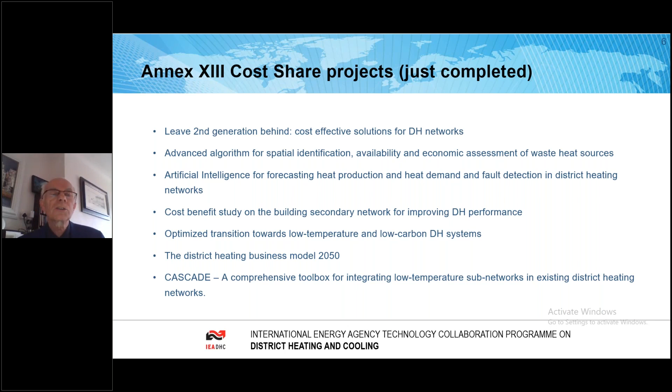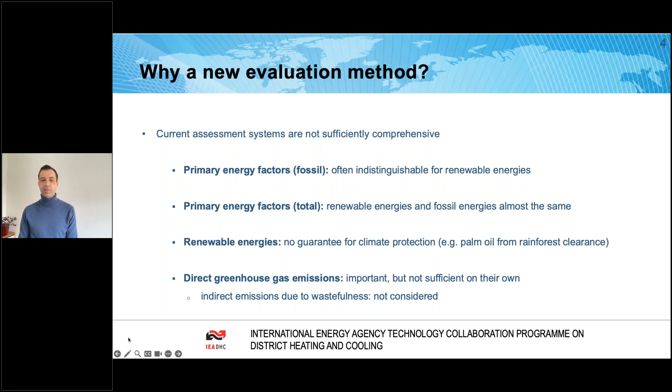I asked the organizers to include the word exergy in the title. I know it's a bit confusing, maybe a bit unsettling, so I hope I can explain it in a simple way. So what is exergy? Everything starts with energy that you should be familiar with, but energy is not the same as energy. It has different forms, power, heat, and if that is considered, one can say energy has a certain quality, and the product of energy and energy quality can be considered exergy.

So what is now this energy quality? So if you look at an energy flow and its potential together with the environment to produce electrical power, that's essentially the energy quality. So if you can convert 100% of the energy you're looking at into electricity, then it's 100%: electricity, mechanical work, or even fuels, because it's an ideal value. So if the machine were perfect, what is the physical potential of it? With heat, even with an ideal machine, it depends very much on temperature how much electricity could be generated.

And that leads to a couple of insights. For example, energy is only converted, exergy is consumed. So when people are talking about energy consumption, it's physically not totally correct, because energy is just transformed from one form to another. Easily seen in gas boilers, you put in fuel energy, it becomes high temperature or moderate temperature heat, and then it becomes ambient heat once it leaves the building through the envelope. Exergy is the product of energy and energy quality, and it can be understood as valuable energy. So power equivalent, but let's say just valuable energy.

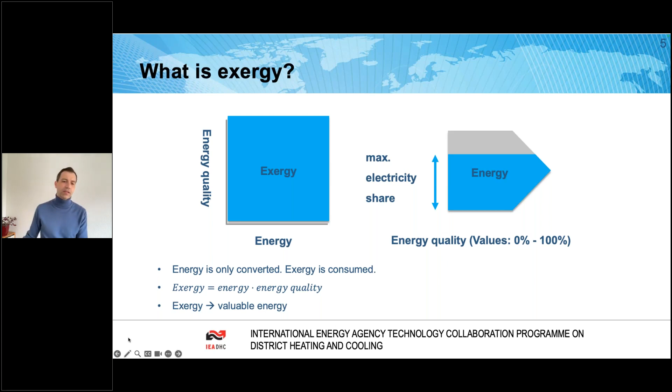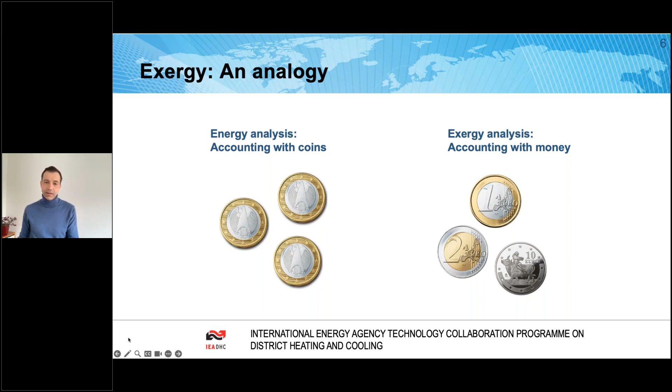An analogy can maybe illustrate this a bit further. So energy analysis is like accounting with coins. So 1 kilowatt hour equals 1 kilowatt hour, whether it's gas, whether it's power, whether it's heat, it's all 1 kilowatt hour. And it seems to be all the same. As I said, the energy quality is not considered, and accounting with coins is also not very helpful when doing bookkeeping. So exergy analysis is kind of the upgrade, accounting with money. So now there is a value printed on these coins that is also considered in the accounting. A high value energy is traded for many more coins of low value energy, and that then can be considered a fair trade.

From the definition of exergy, a bit of expansion: resource exergy. So what are resources? Energy and raw materials from the environment. They can be measured in exergy. Why is this important? Because sometimes balance boundaries are set in a not very helpful way. And why resources? Because resources are storable. That means if we don't use them today, we can use them tomorrow. Therefore, being frugal with them makes sense.

Solar energy, on the other hand, is fluctuating. Therefore, while it makes total sense to make the most out of the solar energy, for cross-technology comparison it cannot be the primary energy or the resource, because otherwise we would have to consider the solar energy that went into biomass or into natural gas or into other fossil fuels as the primary energy if we wanted to do a fair comparison, to avoid that kind of, let's say, ambitious project.

The approach to resources was taken, so it's an energy form that is directly storable in the form you are looking at. That means for solar, PV panels produce the storable resource electricity. Solar thermal produces the storable resource high temperature heat, and that is essentially the input in the system and in the comparison. So this resource exergy analysis is a method that considers exergy and sets consistent balance boundaries.

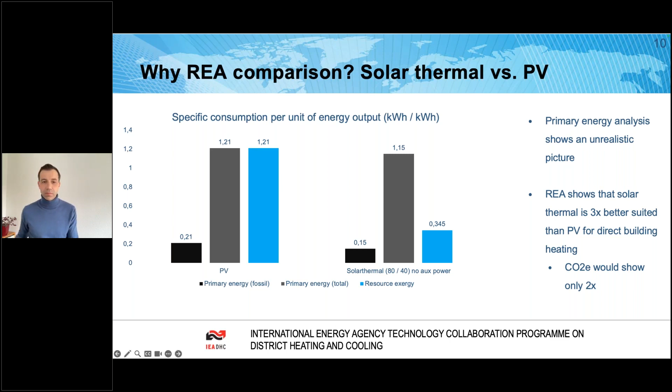One can argue CO2 emissions would also show a small difference, but they are very small anyway. So if any savings are calculated, the savings by employing either PV or solar thermal in terms of CO2 are almost 100% in both cases. And also we would miss the impact on indirect emissions just going for CO2 emissions. Primary energy analysis, on the other hand, shows an unrealistic picture, as we've seen, since it doesn't consider energy quality.

So how can resource exergy analysis support solar thermal networks? It supports the argumentation for such networks by quantifying their advantages comprehensively, showing that these networks already provide a green and resource saving solution that cannot be provided by any type of electrification that uses the grid mix until it's completely carbon free. And when that is happening, we don't know, especially in winter during heating season.

It helps to consider the solar thermal networks in comparison with other solutions, district heating solutions and other individual solutions, and it allows the quality control of analysis results. As I already said, they can be quite wrong without anybody noticing, because nothing breaks down if somebody comes up with a misleading CO2 number or primary energy analysis result. So it helps to mitigate the risk of greenwashing and costly mistakes.

How can this now help with well-informed decision making? Now here is an example of three indicators that can be used to comprehensively do screening of various technology variants of various transformation pathways. One is resource consumption, resource exergy consumption. One is greenhouse gas emission in CO2 equivalents, and one obviously is costs, ideally life cycle costs. But for the first step, maybe costs of energy would be sufficient, simply because if the costs of energy are lower than the reference case, this is a technology that can essentially pay back in time.

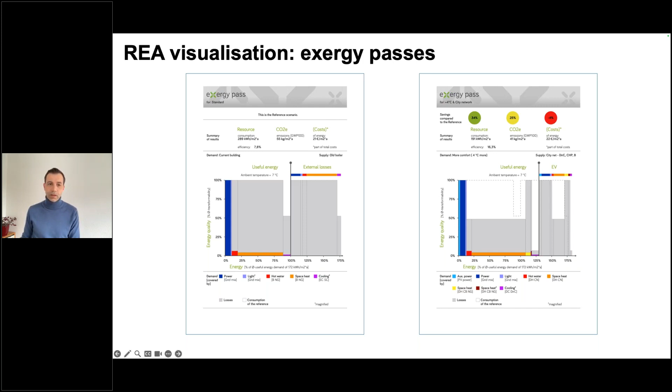And what can authorities do? Well, they can inform the technical staff of the calculation guideline that AGFW, the program manager, put forward, that contains all explanations, equations, and LCA data. You can get accustomed to resource exergy as a key metric for savings and efficiency. Require such calculations for transformation plans, at least as a quality check,

because, as I said, it can be easily wrong without anybody noticing, especially when heating and cooling are included, especially when solar is included, because for solar thermal, there's also one issue with the LCA analysis, that the solar energy is considered primary energy, while it cannot be saved by not using it. So I think that might be a problem that resource exergy analysis can also solve. If you're interested in this methodology, contact me for more information on how to apply it most easily.

I'd also like to end with a small metaphor. Heat and transformation plans without scientific validation are like a car without official approval. You can't rely on them. And since countries and municipalities place a lot of money based on these plans, I think it's worth doing a double check, ideally doing something like resource exergy analysis.

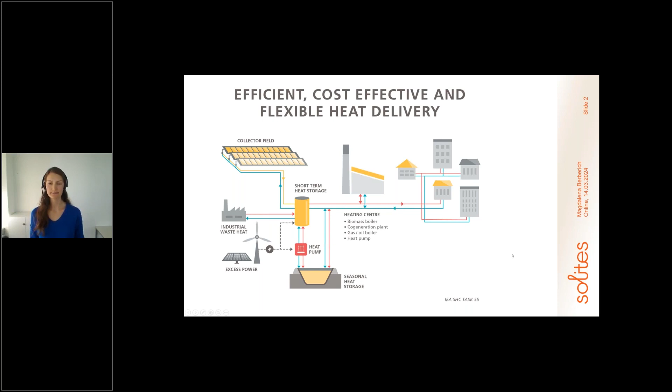So you need some waste heat or other excess power or other components with renewable heat as renewable heat sources. Then here in the district heating systems, there is the demand in the buildings, and you have a heating center in the middle with maybe more system components. I have some examples so you can see how it looks in reality.

Here the solar heat grid in Ludwigsburg. You see here the construction works. It's a simple method of construction with ram profiles in the ground. It's very fast and cost efficient. And on the right side, you see the picture of the installed collector field near the city. So here you have a direct delivery of heat to the city's district heating network.

And here's one example where you have the field shared between two grounds. So in the middle is the street, and here the neighbor city has this field, and this is the field of Ludwigsburg. So it was, I'm missing the word, but it was not so easy to get the permission to build it because it's divided into two areas of cities.

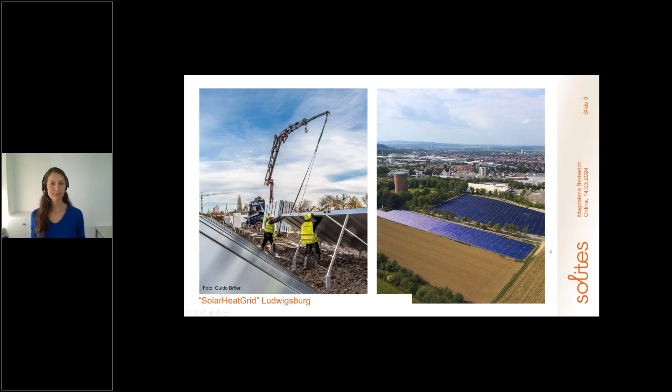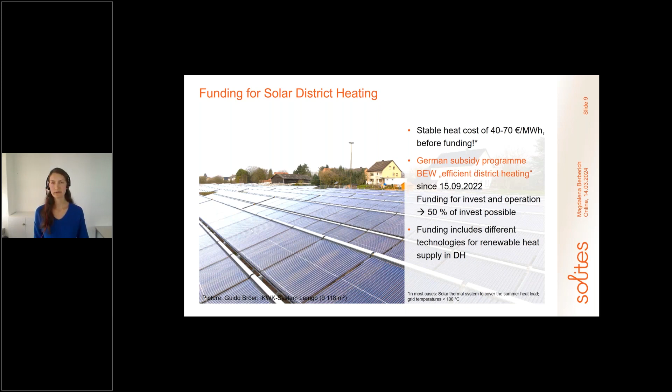And we see that there is a good development in the market, but there were some stops or not so much development here in 2021, for example, because for 2 years there was the waiting for the new funding scheme BEW. It was said that it will come, but then it needed more time, and so the market was waiting, and the investors, of course, waited and said, no, I will not invest now, but I will wait for the good funding opportunities. And so the plants which were thought about in 2021 were just installed in 2022 and in 23.

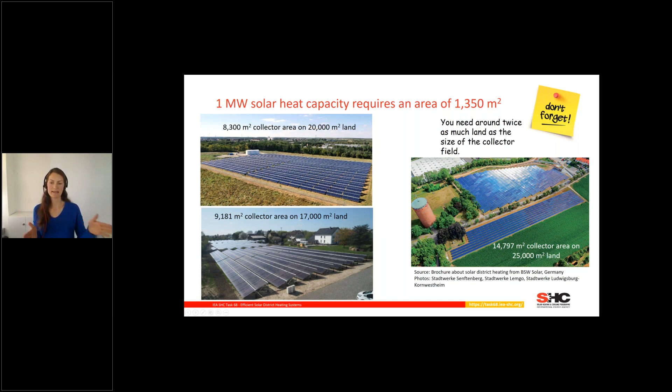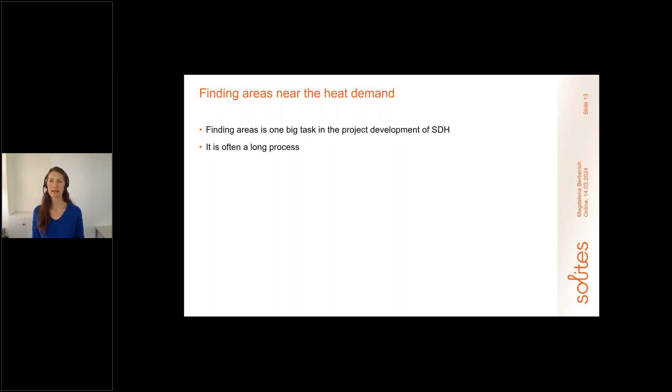So finding areas near the heat demand is very important, and a big task in the project development. And it's often a long process. What is important for this? The communication between utilities, investors, and the local authorities. A structured analysis of possible areas, and it's better you find more areas than less, so you can use them maybe for other future projects.

One example as a best practice here for almost fossil-free district heating of 95%. It's a system which is in the real planning process now, and it's very special because here a big heat storage is built in an earth landfill, and so you can store the solar heat seasonally, and so provide it very efficiently to the houses. It's a new building area, and with the solar thermal, the heat storage, and shallow geothermal, 95% fossil-free district heating is possible.

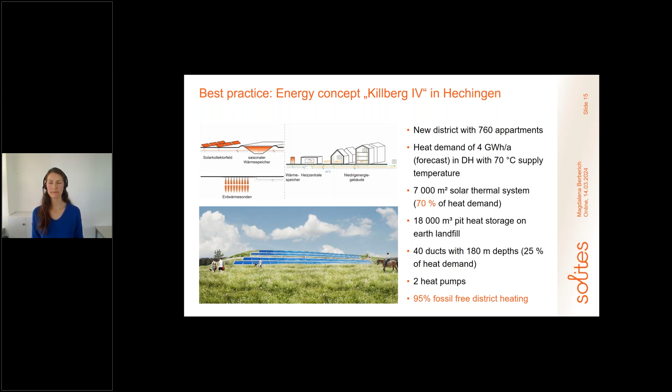Another plant which is just installed and will soon be in operation is in Sonnershausen. It's 6,000 square meters of collector area, and it's a new product. It's high vacuum flat plate collectors, and it's very efficient because these high vacuum flat plate collectors can produce temperatures of more than 100 degrees. And this is not necessary here.

It's normal district heating, but there are a lot of cities in Germany with district heating with more than 100 degrees. And this is something we analyze in the IEA SHC Task 68 to find solutions. How is it possible to include solar thermal in these district heating networks with higher temperatures in an efficient way?

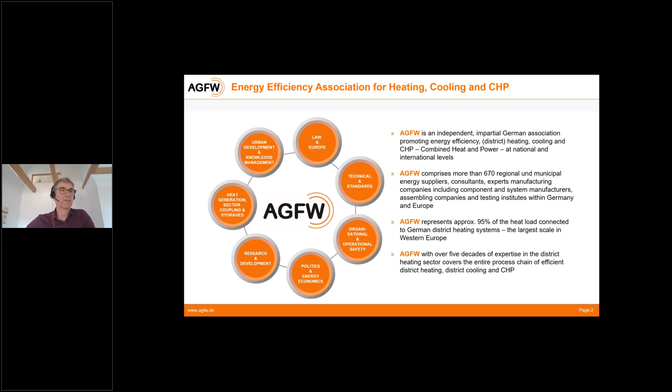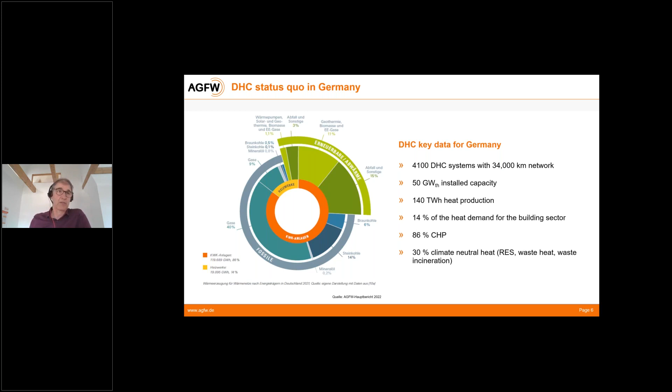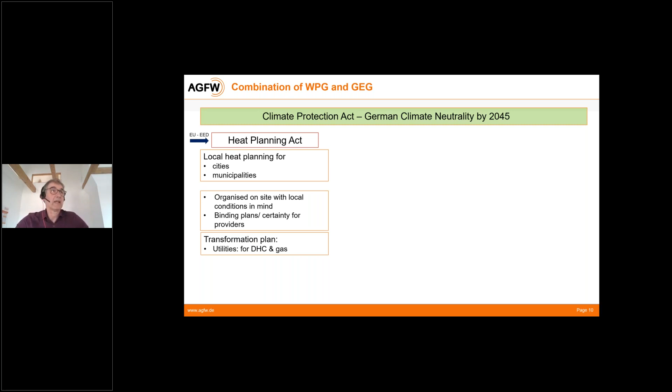And this was then combined with the Building Energy Act. There, the addressees are the building owners. They have requirements that they have to change to 65% renewable energies. And the important point there is, one possible option to fulfill the building energy requirements will be district heating and cooling. So if you connect to district heating and cooling, or district heating and cooling is developed in your area, and this is, let's say, with a commitment, then you're fine with all the building requirements.

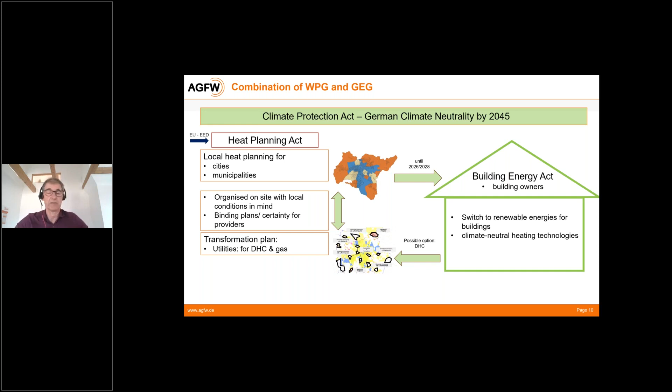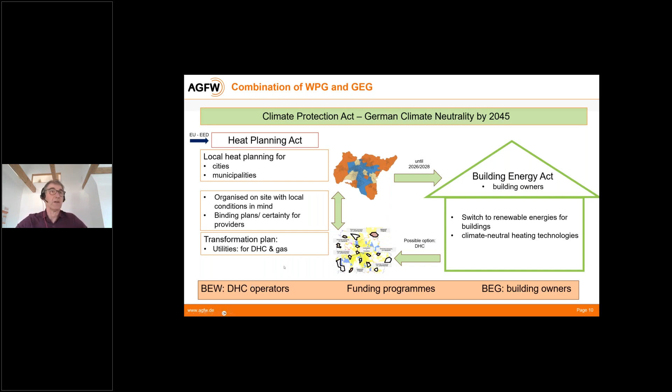And this, of course, also gives quite a push to the sector. And this was also underpinned with funding programs, both for district heating operators and building owners. The one for operators is called BEW, which is Bundesförderung effiziente Wärmenetze. This was published in 2022, and it was really a game changer because the enterprises have been ready to invest. There are 4 billion euro for 2022 to 26. It seems a lot, but investments are big, and we hope that it will be sufficient. We also see that in this 1.5 years, already 1,300 applications have been made, and already around 700 million euro have been approved.

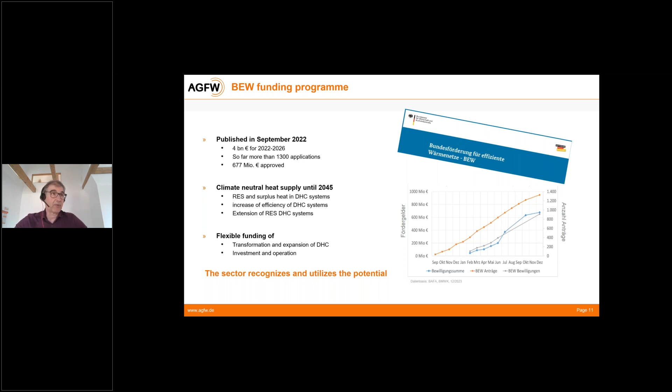And the good thing is that it's really a holistic program, financing both measures in the district heating network, also extension of district heating networks, but also change of the production capacity to renewables. And just shortly to show you how this works, it's subdivided into 4 modules.

The basic idea is, as a district heating supplier, you first have to make a plan and a clear picture of how you want to decarbonize until 2045. So you have to paint the final picture, and you also have to show your roadmap to this final stage. And then you can take the first slice and plan it in detail. Such a slice is 4 years, and then you make an application to get financing for that.

This transformation plan is financed in module 1, and module 2 is then the first slice of 4 years. Then you can invest and build, and at the end of this 4-year period, you can already go to the next step, prepare the next slice, make the next application and come to the next investment period. And then there's also module 4 giving operational cost subsidies, and the basic idea is to make renewable district heating and cooling economical at the same level as CHP, combined heat and power, was so far.

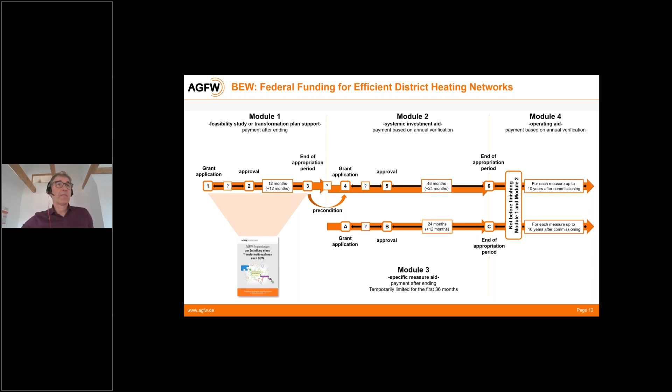Okay, and we have quite nice lighthouse projects coming up with all these initiatives. Just last year we had the first river heat pump with 20 megawatt in Mannheim. There's another one in Stuttgart. In Cologne, it's a 150 megawatt plant. We have the biggest solar thermal plant also in planning in Leipzig with 46 megawatt, and other plants coming up. And it's nice that the branch is recognizing that and really taking this opportunity, planning and doing investments.

So just in brief, from our viewpoint, what are the challenges and opportunities for solar thermal? Of course, there's competition also between renewables. The real competition is, of course, fossils, but anyhow, the enterprises make their choices. And how do they make their choices? They look at the various technologies and how they fit in the complete final picture and the roadmap. They look at ecology aspects, economics, and security of supply. The environmental aspects of solar thermal have always been perfect and really convincing. Luckily, economics are also no problem anymore today, because competing with other renewable solutions, solar thermal is doing quite well, especially with this funding program.

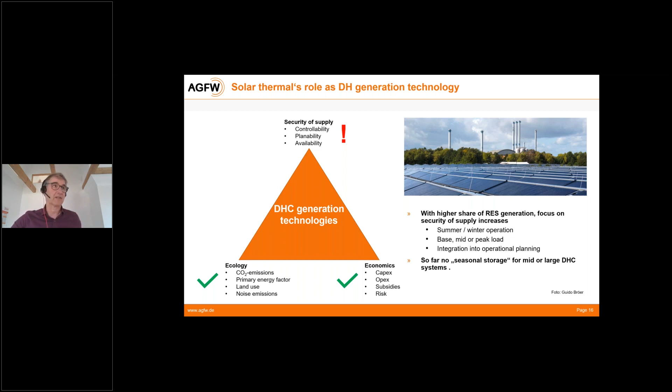Temperatures of networks are still high, especially in the larger networks. Supply temperatures can be 110, 120 degrees. Reducing to 90, 95 degrees is possible, but it's quite an effort. It's not simple. Luckily, solar thermal can work at these temperatures. The collectors are ready to deliver at the summer temperatures of the networks. That's not a problem.

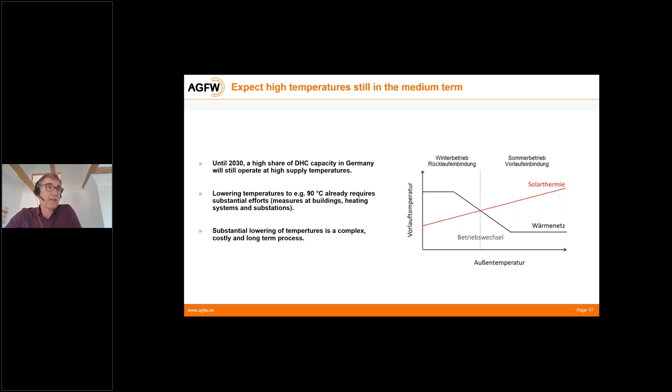We also promote really checking how we can integrate solar thermal in outer areas, remote network areas. Just imagine, if you go to the really central places of the district heating networks where the power plants are, you have high pressures, high temperatures. If you go a bit out remote, there you find more areas where you can put solar collectors, and the conditions are much better for solar thermal. And even from a hydraulic point of view, it's quite good if you have, for example, an extension in an outer area to look at these parts.

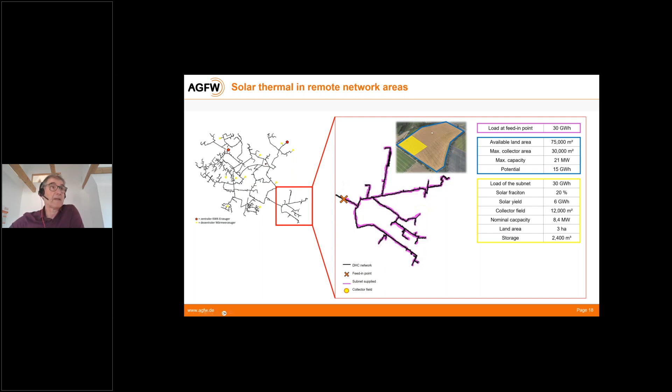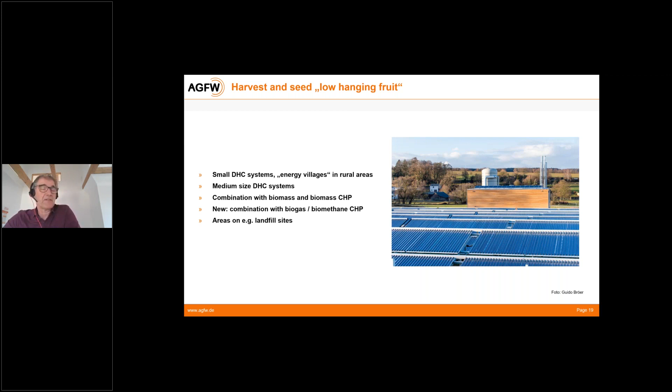We think there are really convincing low-hanging fruit, like the combination with biomass. Also the combination with biogas and biomethane is working quite well at the moment, because biomethane producers don't want to burn the biomethane anymore. They want to feed it into the gas network, because this is paid very well. So we should continue to harvest and seed this low-hanging fruit.

And last but not least, areas are still a topic, not only for solar thermal, but for future district heating in general. We need areas for putting heating centrals close to the, let's say, urban, not centers, but close to the living areas. And still, I think authorization procedures are not yet sufficiently short. There is still some work to be done in these fields, also after all the efforts which have been done in the last years.

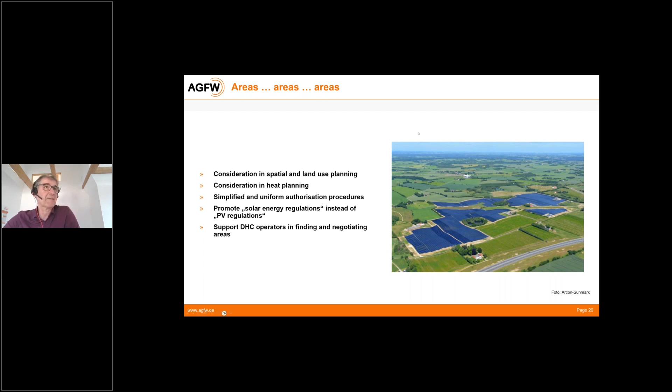So I come to my conclusions. We see at the moment that this transformation of district heating and cooling is very dynamic, but it's a long-term process, and it has quite some challenges, and it has high cost. There's no doubt on that. It has to be financed. So solar district heating will be one promising technology in that, and has to adapt to these requirements of DHC transformation. And we have to really work on the regulatory obstacles to solve them urgently and as soon as possible.

At the present situation, we already see quite a demand for solar district heating. In all these transformation plans which are made at the moment, we see very often solar district heating plans. That's quite nice. Many doors are open now, and we have to find pragmatic solutions and be fast in the development. Thanks for your attention, and I'm ready for your questions.

Thank you, Thomas. Very useful, very informative. Thank you very much. I'm also feeling slightly nostalgic for my days in Germany, seeing all those beautiful pictures of Germany in the sunshine. So thanks for that. Gets it out of the grey early spring days.